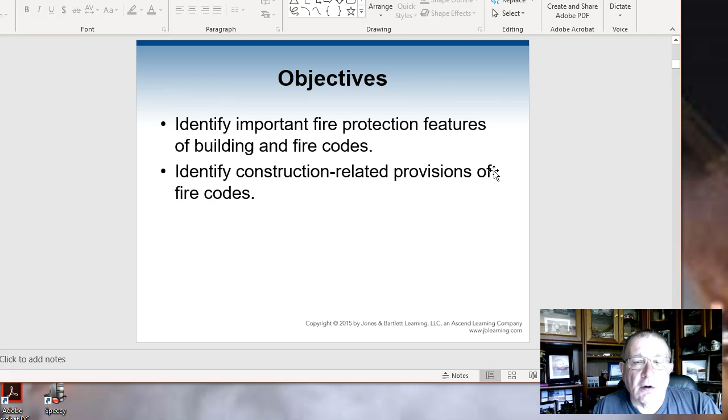The objectives are pretty much the same. The fire protection systems and building and fire codes are all about basically saving lives and living in a safe environment.

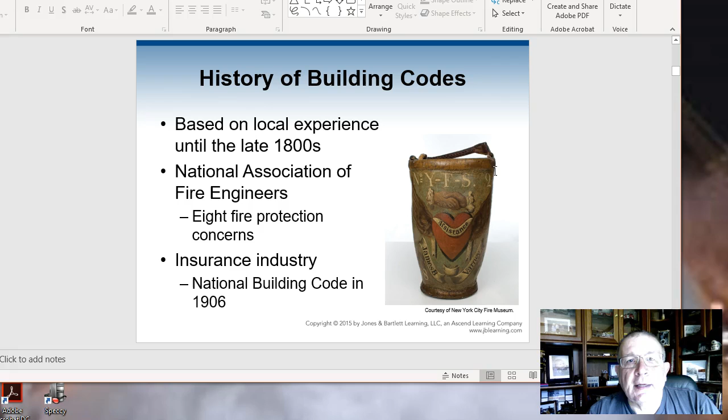The building codes history goes back to the late 1800s. The National Association of Fire Engineers and eight fire protection concerns all came about. But the biggest thing was the insurance industry realized one thing, that they needed to have a code that makes sense. So the model codes were developed, and so came about the National Building Code, the Uniform Building Code, the Standard Building Code, and of course out of all that came the International Code Council, which exists today.

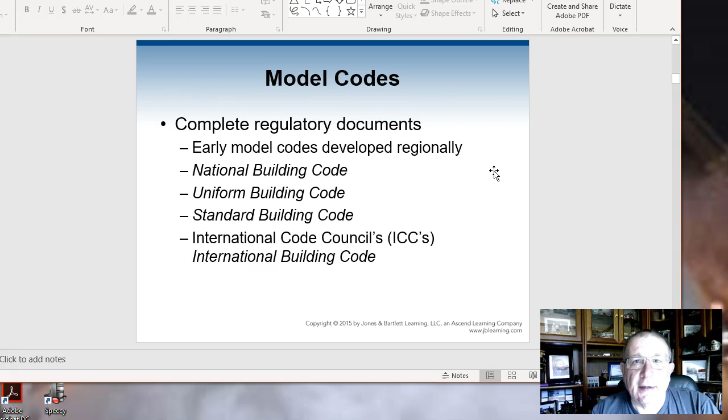Older codes were regionally adopted, but are no longer produced. Fire codes today generally have an update every 3 years, and they're all based on the standards. And if you know about the standards, they come out of NFPA and the various testing agencies that support those standards.

Fire code regulations are to be employed on the fire service after the building is built. Basically, I tell everybody, we never get a divorce from a building. We inherit it till the day it goes on the ground. And I think the biggest thing I can tell everybody is that if a building is built bad from the beginning, the fire department always has to deal with the inspection headaches that go with that building. And again, the fire codes and standards are updated every 3 years.

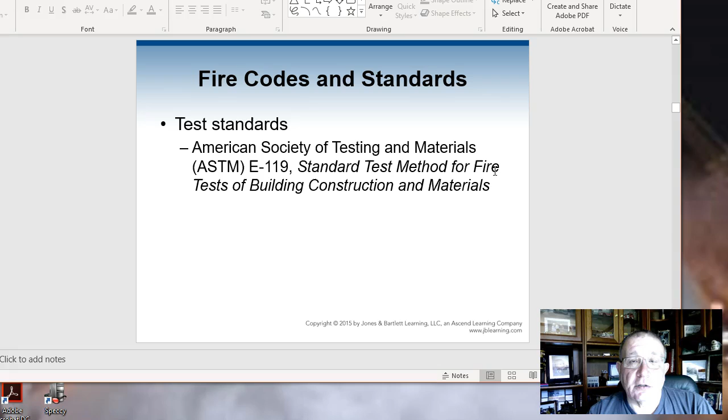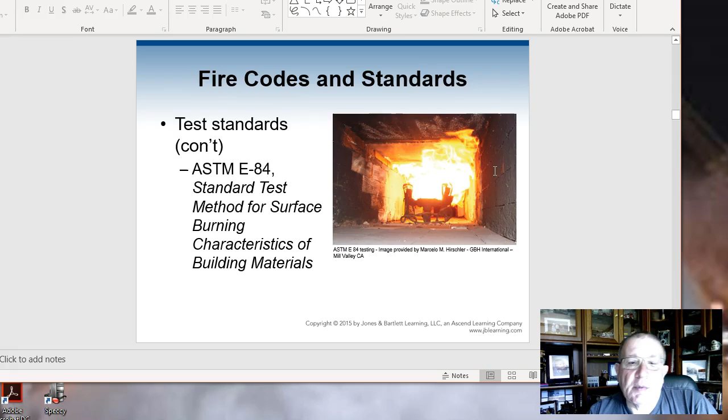Testing standards come from the American Society of Testing and Materials. ASTM E119 is the testing method for all construction materials, but it does change by standard of testing. ASTM E84 is the fire surface or surface burning characteristic test, and that's also used to determine what type of building materials are out there.

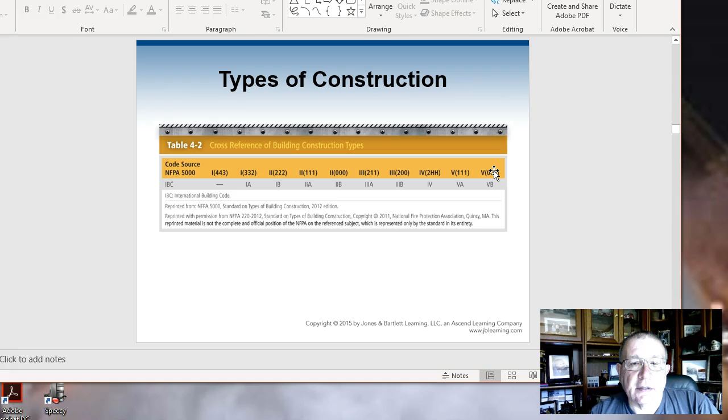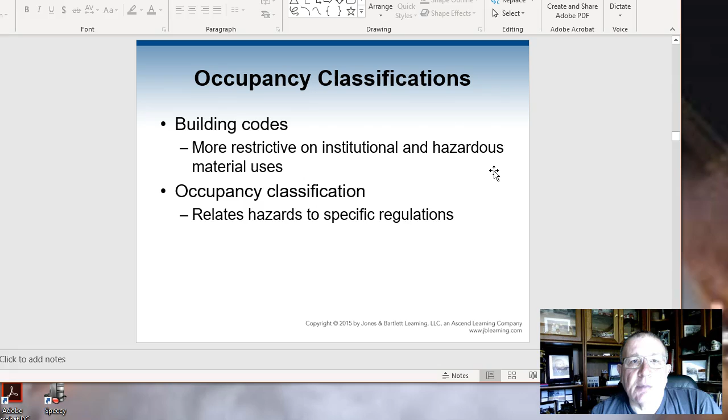Construction codes have come into the International Building Code, NFPA 5000, and of course the hybrid buildings that are out there. This kind of gives you an example of the codes and the references, and I direct you to the text on that. Occupancy and classifications of building codes, and how are they employed by the occupancy and the type of building that's being built.

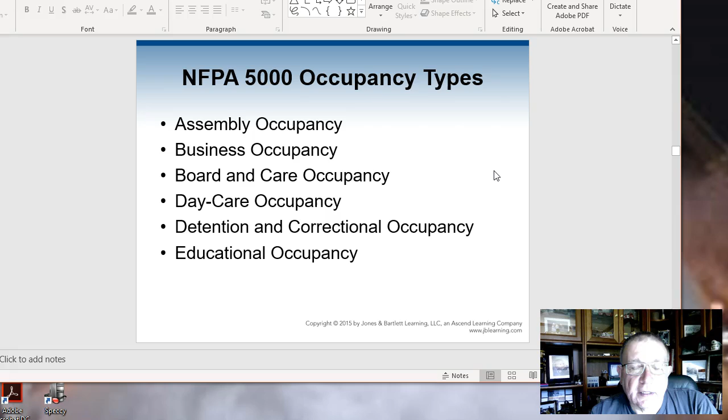You've got to remember A1 through A4, B and E, B being business, E being educational, F1 and F2, and then H1 through H5 being high hazards. But the biggest thing is A is for assembly, B is for business, D is for daycares or detention and correctional occupancy, and E is for education.

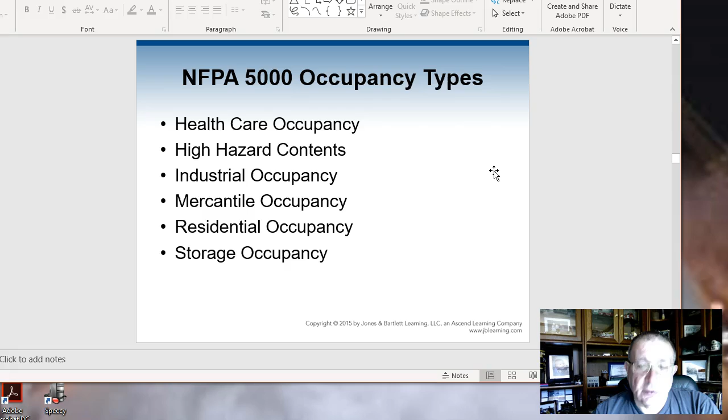The 5,000 types are healthcare occupancies, high hazard contents, industrial occupancy, mercantile, residential, and storage. Building height and size are required under various codes, and also local zoning controls the height of the building. So don't forget that.

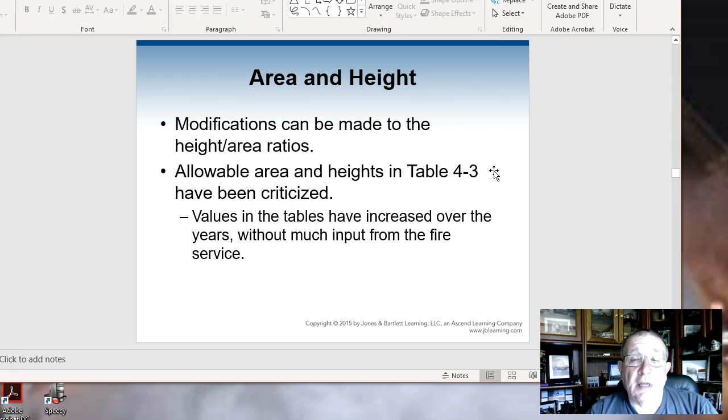Modifications in the tables that are there - one of the things that's changed in the building code that I can tell you right now is we're now building high-rise buildings again, more than 4 stories. Most you'll start seeing 6 and 8 story buildings being built out of wood construction. Table 4.3 kind of lends you to how the construction type is - 1, 2, 3, 4, and 5 - and the hour rating as needed.

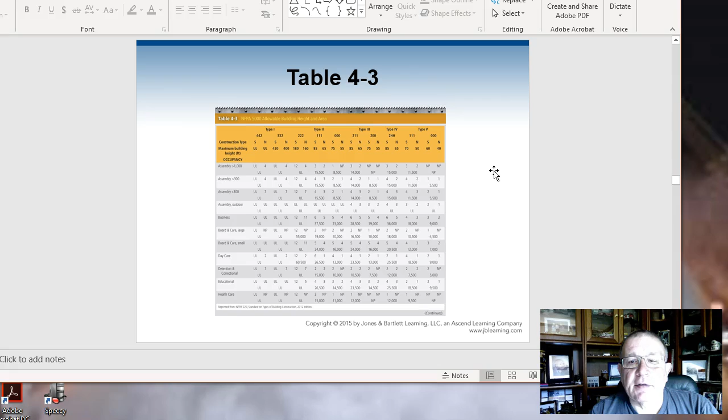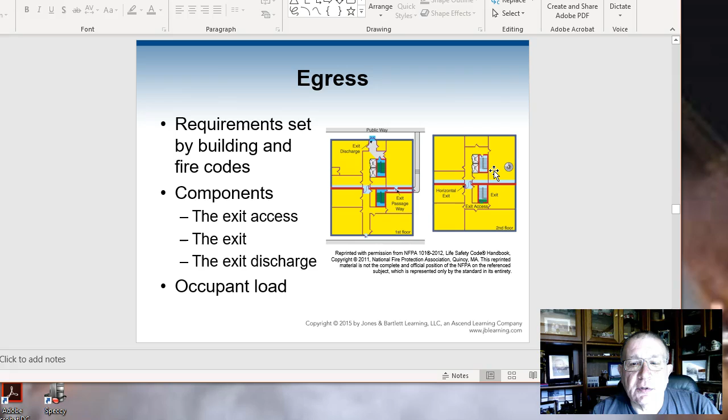One of the biggest things is special hazards. You have special structures such as atriums. You've got your high-rise structures. You've got your open mall spaces. You've got egress issues with all these buildings - what's a good way for the flow pattern out of the building? But more than anything else, you have to look at the occupancies, how they're rated in the building, and the type of load that occupancy can handle.

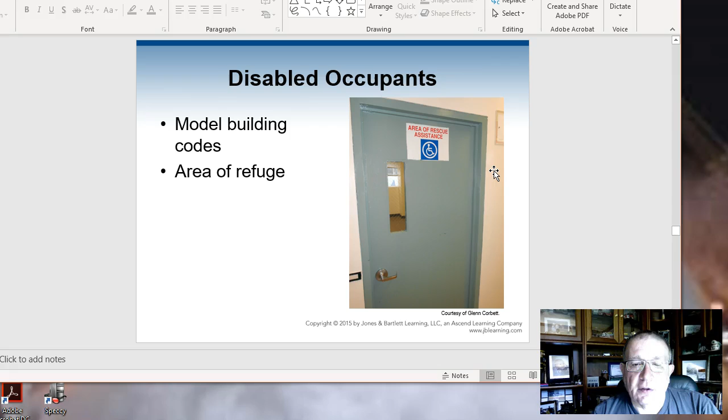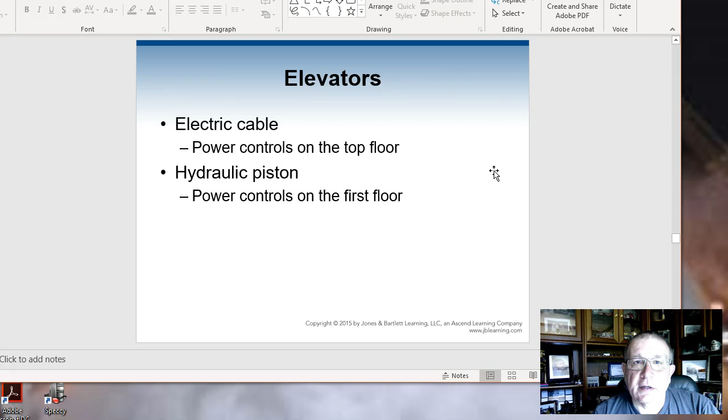Areas of rescue and assistance are there, but the biggest thing you've got to look at is the purpose of the building and how people are going to get out. Fire protection systems matter too. Elevators are key — is it a hydraulic elevator or electric cable? It all depends on the height of the building and the purpose of that elevator. You're not going to use a cable elevator on a 4-story building; you'll use a piston type. But you'll use a cable elevator on a 6, 7, 8, or 10-story building.

Phase 1 operations are for recall. Phase 2 is for the fire department, giving them access to the upper floors.

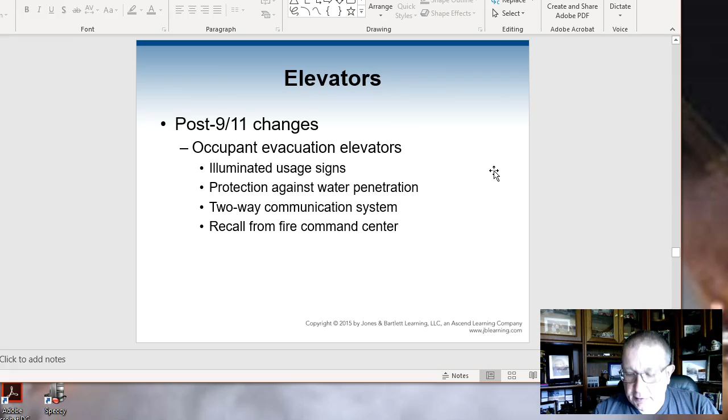Elevators, post-9/11 changes: occupant elevators, evacuation elevators, illuminated usage signs, protection against water penetration, two-way communications, and recall from a fire command center were all changes that happened after 9/11. It also brought elimination of hoseways, a minimum 150 square foot lobby, and class 1 hose outlets in the stairwells.

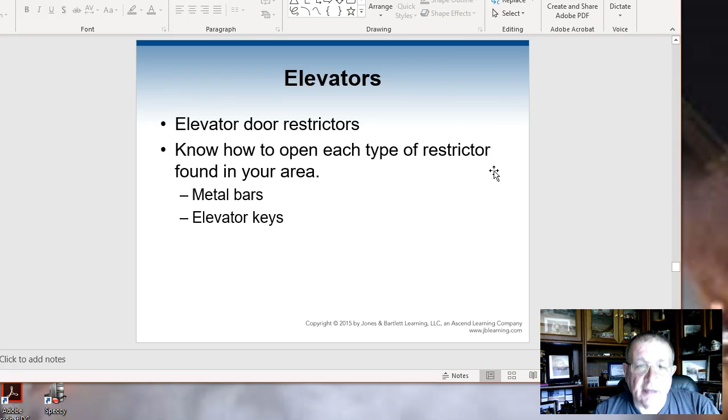Elevator door restrictors — you need to know how to open each type of restrictor found in your area, metal bars, and elevator keys. The building code itself provides a lot of good information; I direct you to read that.

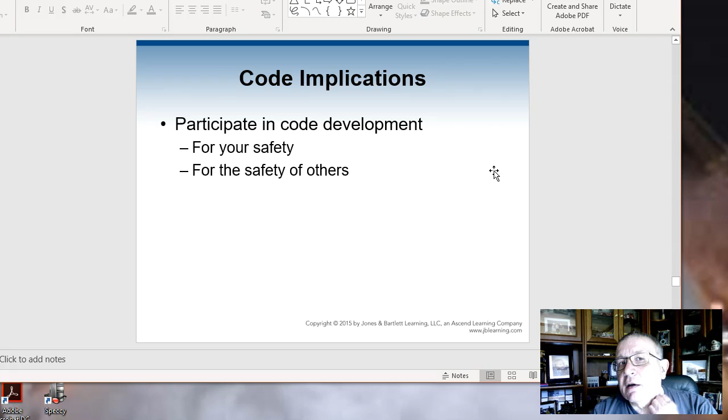Code implications: what happens when the code doesn't address your concerns? You have to go through research and assess the proper code against NFPA findings and how that comes out through code, fire code regulations, and also through the standards. The standards sometimes dictate how the code has to be applied.

So in chapter 4, you're looking at what the subsequent regulations are and what's going on, and how they've been applied in towns and cities.

This is a good example, quite frankly, of a quick summary of what you're going to see in this chapter. You need to read the chapter and understand what you're doing here. Thank you.

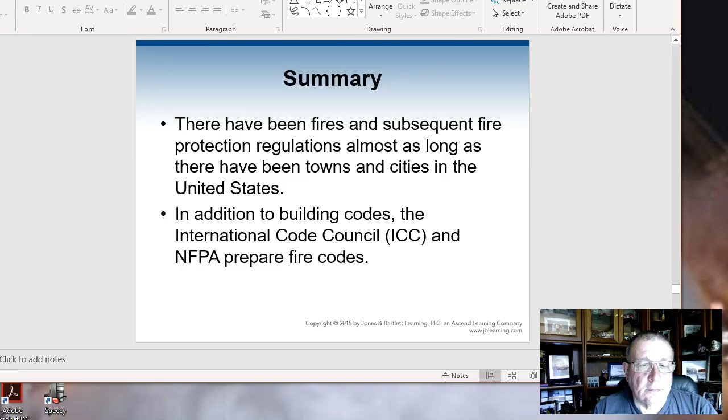Okay, we're going to start out with chapter 5 here, fire behavior and building construction. It's pretty much an add-on to what we dealt with in chapter 4, but you're going to start looking at some things a little different. The objectives here are the fundamental behavior and the key to fire phenomenon.

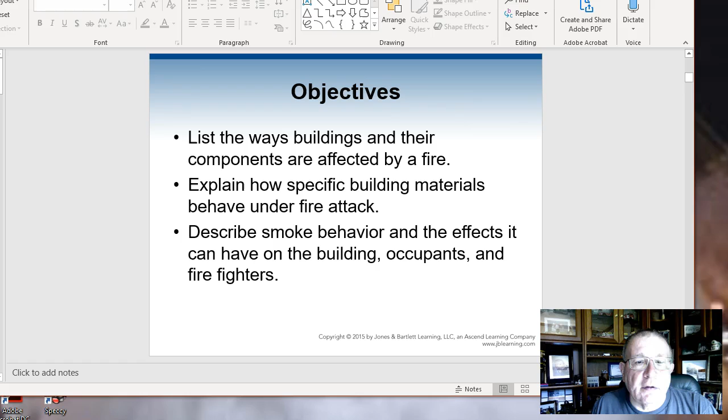The big thing is to list the ways buildings are affected by fires and the specific materials that behave under attack of fires. So we go into basically the fire behavior elements here. I'm not going to get into a long lecture on this — this is in your book. But heat transfer is really important. This is a good example of conduction, convection, and radiation.

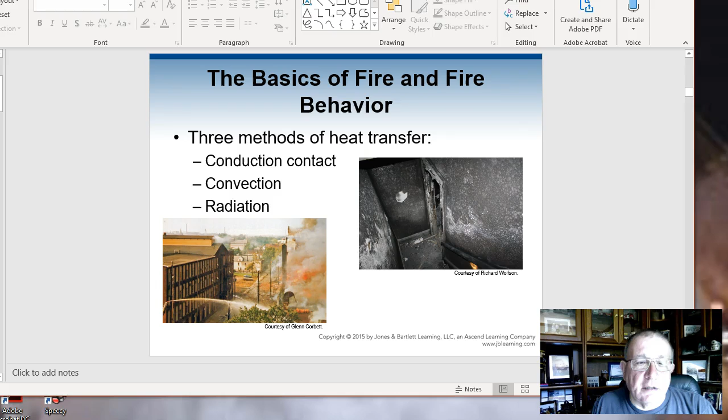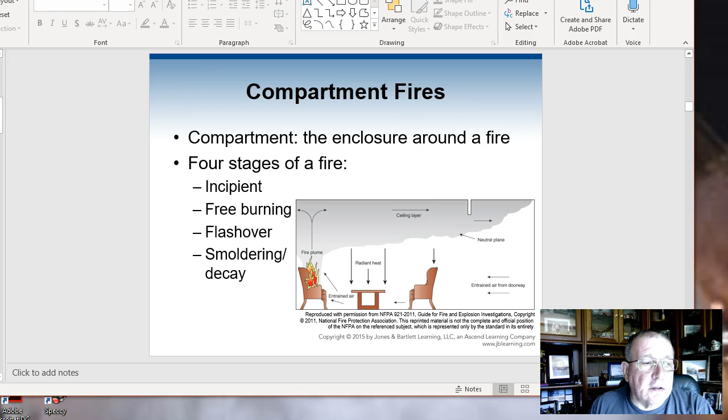Compartment fires basically go through the incipient, free burning phase, flashover, and smoldering decay. Those are key elements you're going to see in the basic concepts of fire behavior. One of the big things you've got to look at is a fire plume, smoke, heat, gases, ceiling layer, and the neutral plane.

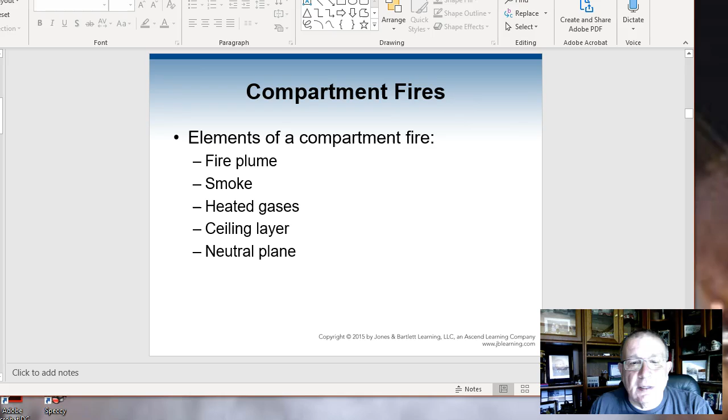But the big thing is, more than anything else, you must consider all the tactics that go along with fighting compartment-type fires. You've got to look at the interior combustibles, the vertical openings, the height of the room, proximity of walls with each other, and HVAC systems.

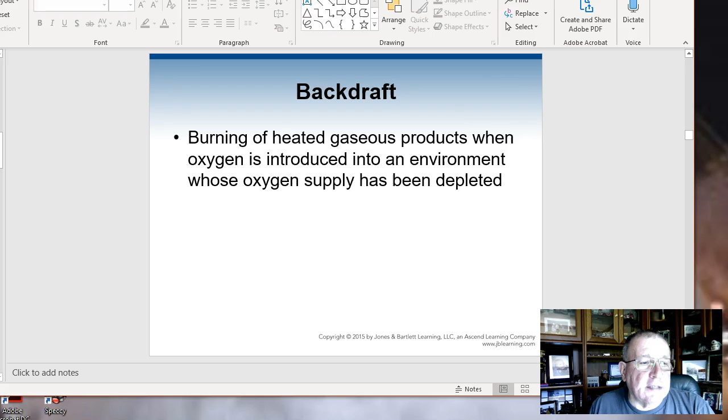Today's fire service, I'll tell you this right now: in lightweight construction, it doesn't matter if it's steel or wood — any lightweight construction — the rapid spread of fire in a building like that leads to one thing, a rapid collapse. You've got to be very careful. You have to understand that those components are combustible enough that they can deteriorate right in front of you, and as an entry crew and a firefighter, you could have a very dangerous situation.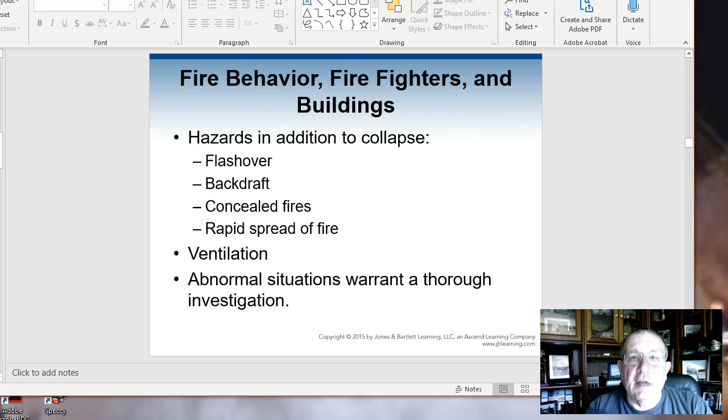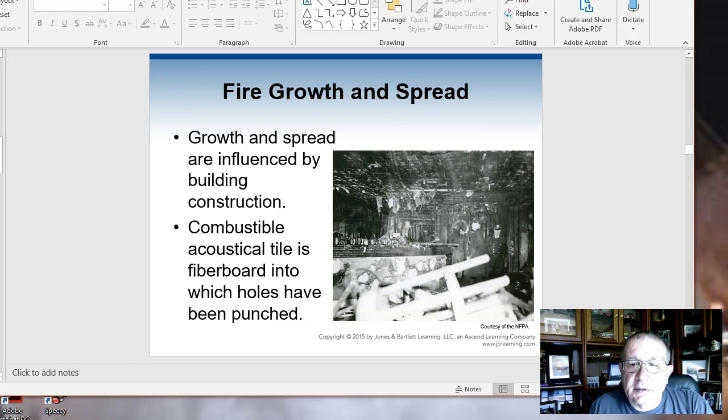This kind of gives you an idea of what happens with fire growth and spread. This is the aftermath that you'll see — a picture of basically what happened after a fire there. In your book, you'll have the MGM fire, the famous Coconut Grove fire, how fast that fire grew and the loss of life that went along with it, along with Beverly Hills in 1977.

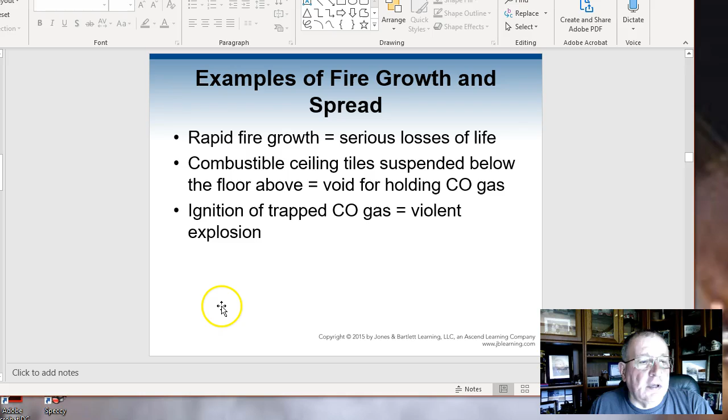You got fire hazards, and the list goes on. As you go through this, you look at your finishes, and you're looking at more than anything else why some of this comes back. Years ago, the big tents were put up with fabric, cork, rattan, and wood, and then they have a fire breakout, and people are dying because it collapses very quickly.

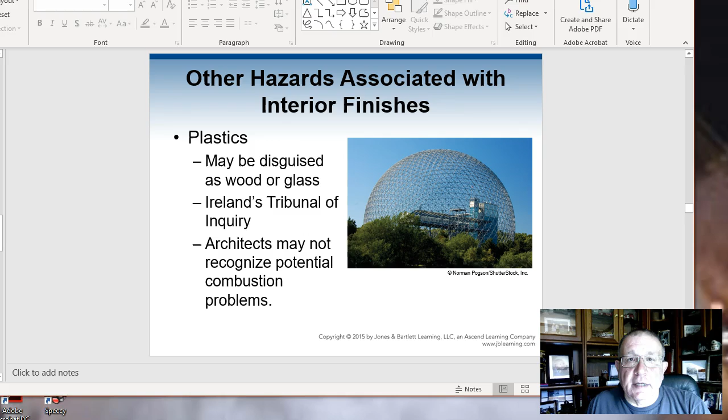Plastic is now one of our biggest problems. If you're looking at hydrogen cyanide, it's just generated from plastics. It's thick, it lays in the air, but you also have SO2 and other sulfides that come about from incomplete combustion. Look at the woods you see today or the cosmetic furniture you can buy. I hate to say it, at places like IKEA or any furniture store, there's a lot of plastic and polycarbonates involved.

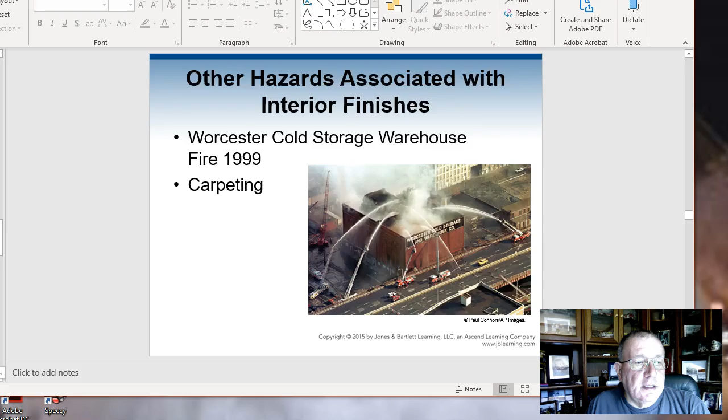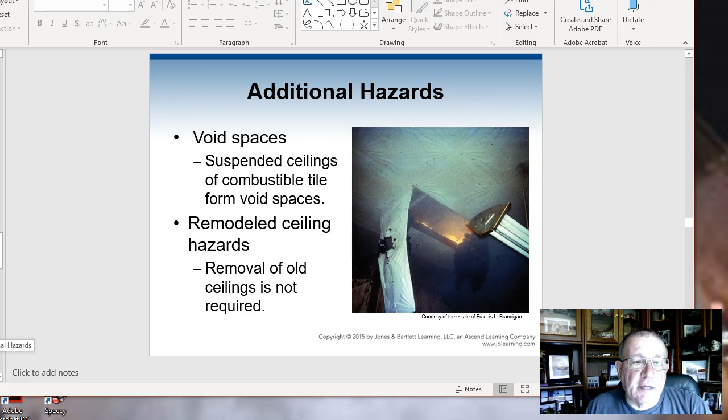In the case studies that I present to you in this whole array of building construction, it's always centered around a line of duty death. And the reason why is because mistakes are made. I'm not here to point the finger. I'm not here to say this was right or wrong, but I'm pointing the finger at the building. So when you start reporting on this, start thinking about the building and what happened with the materials. And you'll be surprised how sometimes we just walk away and don't even look at what we just walked into or walked out of. And we get blinders on.

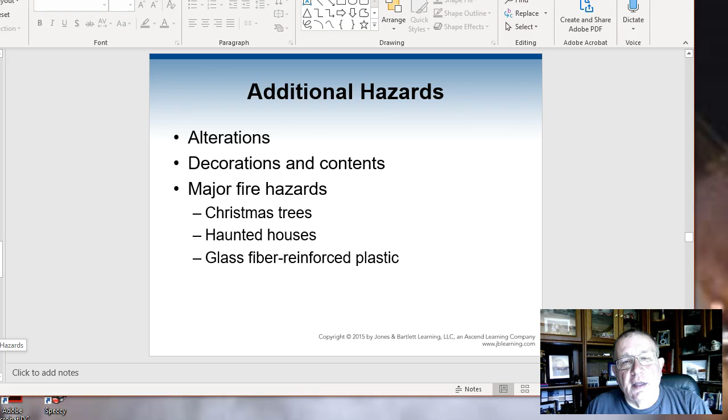Today's office buildings, you got a lot of cubicles going on. So the big thing is now you've got additional hazards with decorations, Christmas trees, people making haunted houses, glass reinforced plastic in the houses and that. But today's fire load and the heat of release is greater today than when the fire codes were basically put into written form. First Interstate Bank fire, hotel remodeling, regulations in California, Boston, and the Port Authority of New York and New Jersey all have different takes on what they want to see in their fire protection.

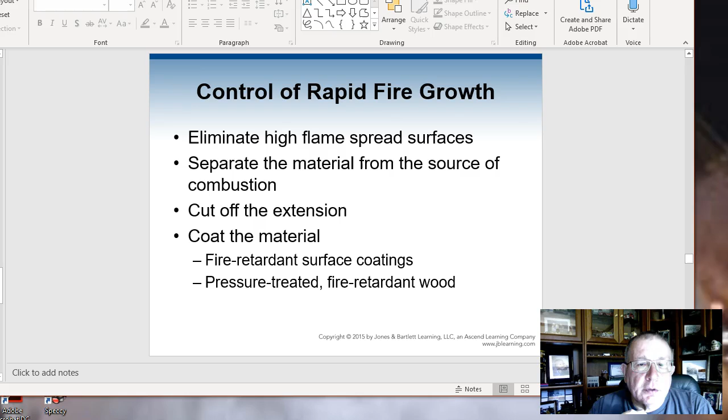Control of rapid growth is important, but the biggest thing, more than anything, is to know your products of combustion. Smoke tells you a lot. Airborne and liquid particulates produced by fire, hydrogen cyanide, carbon dioxide, CO poisoning.

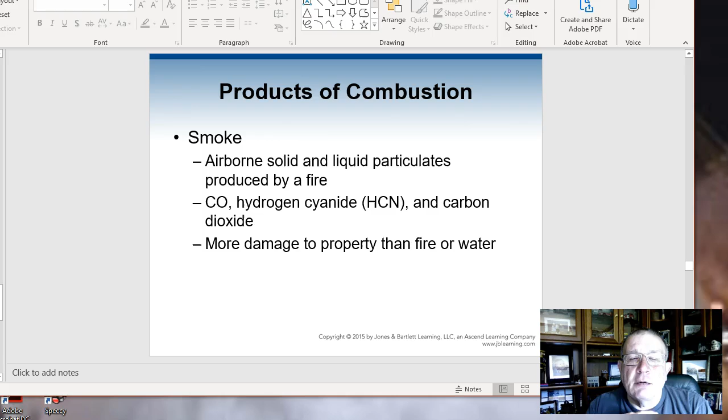More damage is done with property. It can be done with... excuse me, more property damage can be done with water than with fire.

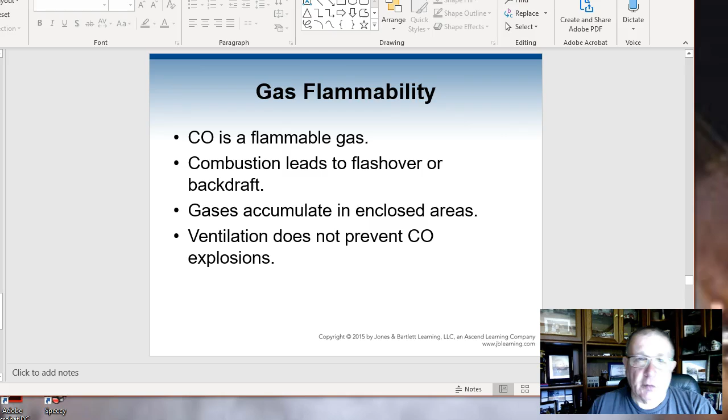CO is a flammable gas taken to the right ignition temperature. Combustion leads to flashover and backdraft. Accumulated gases in the closed area of ventilation do not prevent CO explosions. You got to look at this. You got to ventilate a structure the proper way. You also got to look at what's burning, and you also look at how these gases are going to build up on you and how quick they can turn the tide in a structural fire.

You got to look at the physical effects on people. CO is odorless and tasteless, and smoke particles can prevent air from filtering through properly, causing people to lose their sense of direction, and so on and so forth. Smoke damage may be the most expensive byproduct of fire. It's everything. If you have a smoky fire, everything's basically destroyed.

Contamination by radioactive material, polychlorinated biphenyl, PCBs are very dangerous and very costly to clean up. A nuclear plant in Hanford, Washington - the cleanup probably cost more than the plant itself, all because of the toxic effects of PCBs.

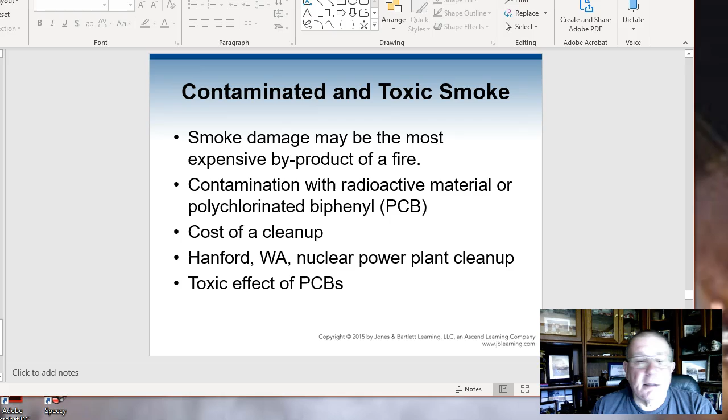Summary: fire behavior is critical for all firefighters. And the biggest thing is that you have to look at the associated risk with fire growth, how high flames spread in materials. Biggest thing is, more than anything else, look at the strategic events of a fire, how the fire has grown and where it's going and what's going to happen.

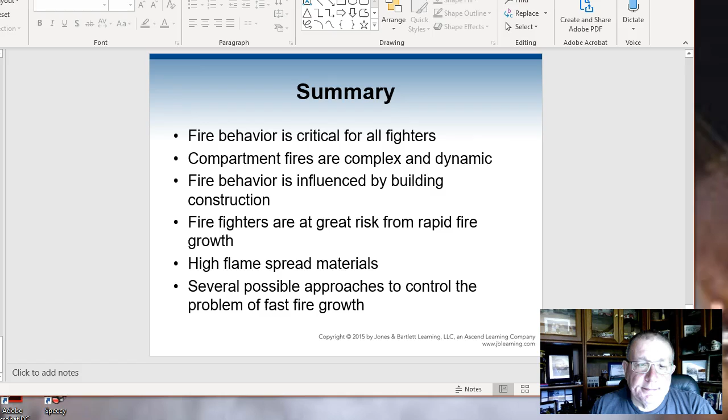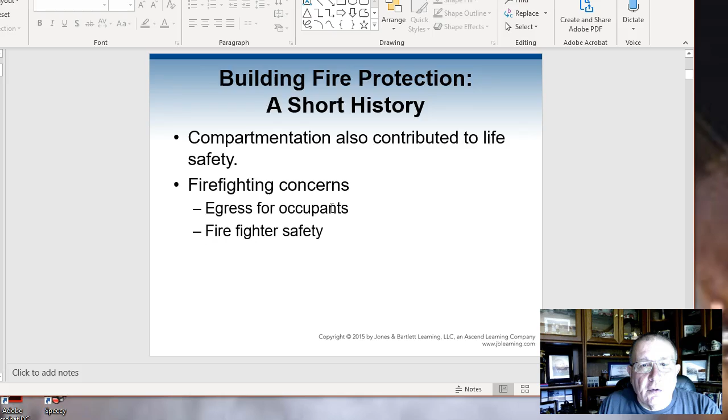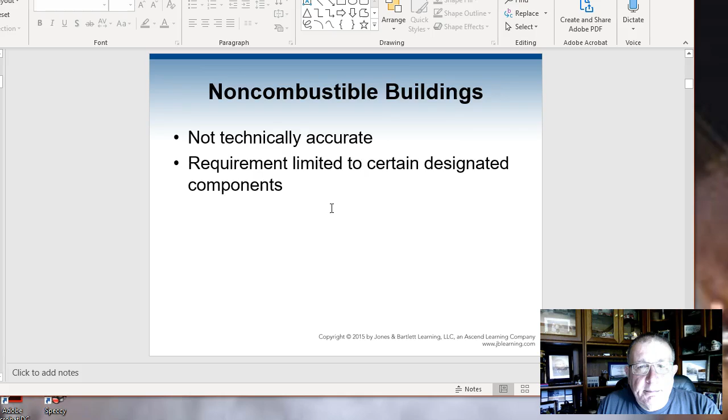This is chapter 5. Chapter 6 is a very long PowerPoint slide presentation, and I'm not going to go through the whole thing. Non-combustible buildings is part of it. Fire terminology is part of this. Non-combustible buildings, again, fire resistant designation, early fire test.

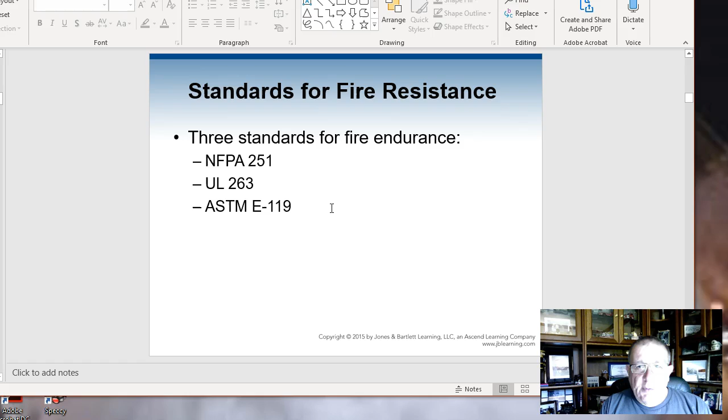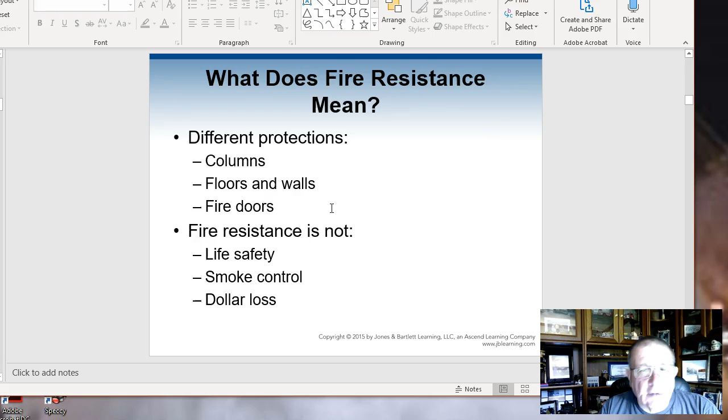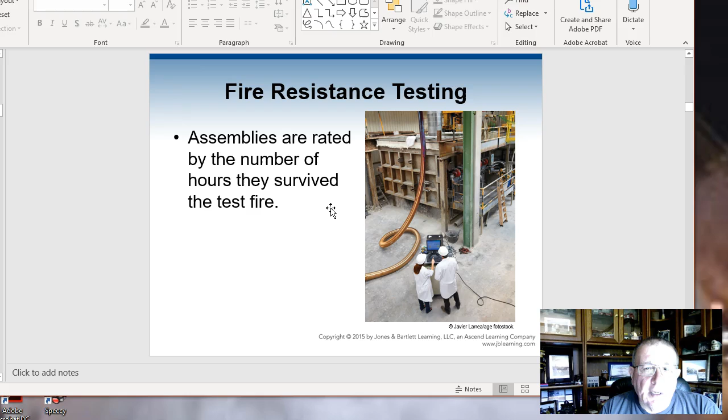Columns, floors, walls, beams - fire resistance is not just about life safety, smoke control, or dollar loss - everything is important. There's a good slide in the book, slide 18, in regards to fire resistant testing and how things are done, and it gives you a good example of how that goes through.

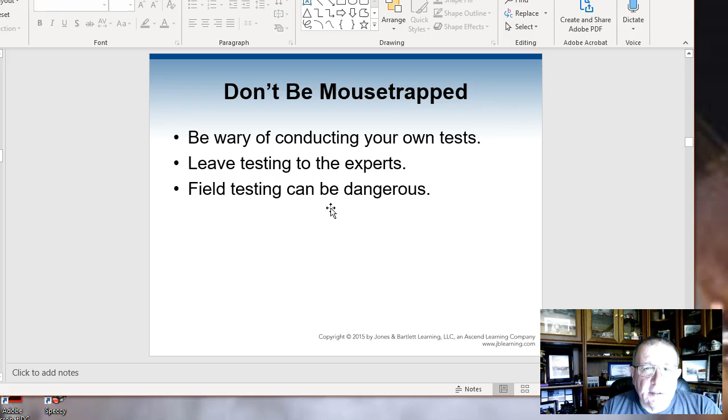The big thing is, as I go through this chapter very quickly with you all, this is just a snippet of what you have in this chapter. You have to look at fire containment systems that are being installed, fire dampers. Buildings have fire dampers in them. There's a massive amount that goes into the ductwork in regards to HVAC, so it can stop the flame spread of fire through a duct system.

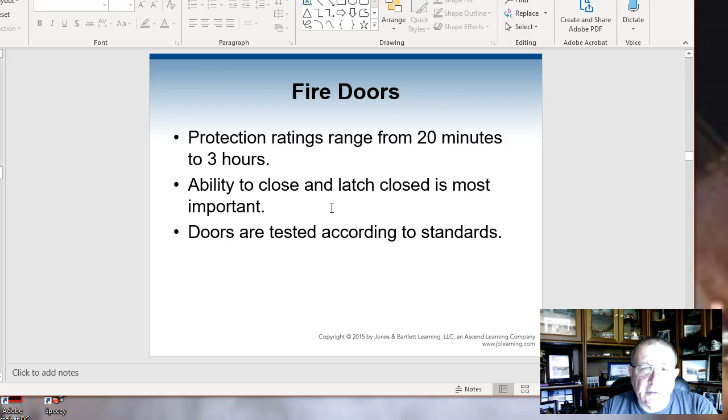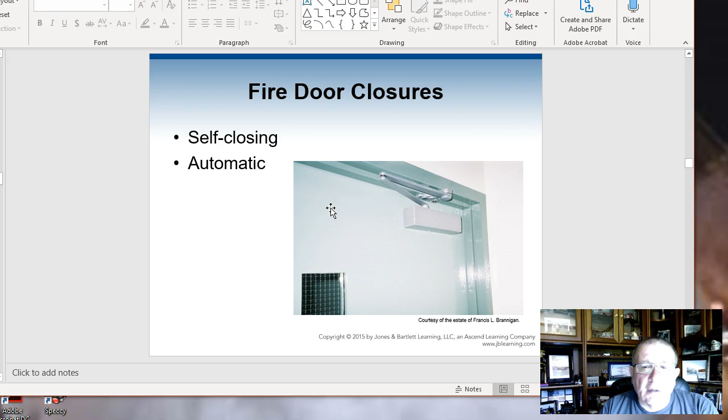Fire doors have to be rated, and they need to be in any commercial structure. Generally you'll see fire rating doors at 2 to 3 hours. A good example of that is a swing door like this with panic hardware on it. Big thing is overhead doors and rolling doors - these are all part of this, and so is the closure on the building. So you've got all these to deal with.

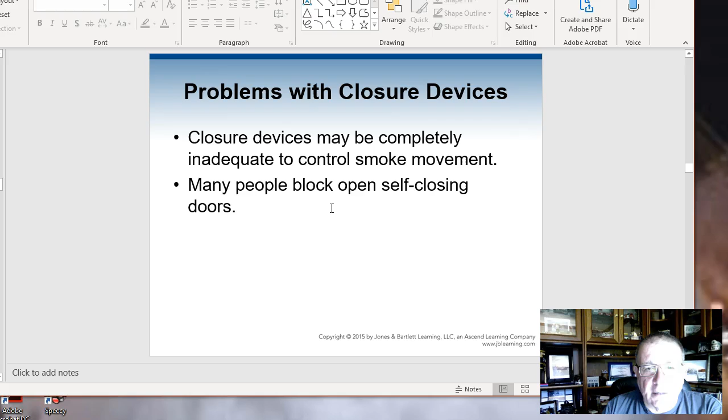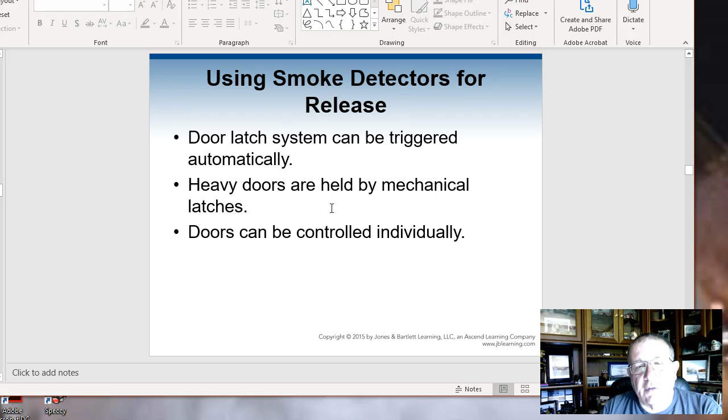Problems with closures - what happens is generally in a real smoky environment, they become stuck, hard to open up. And sometimes people block open self-closing doors. The problem with that is when they block it, it makes it very difficult for the door to react the right way, what it's designed to do.

The other thing is stairwells. People like to wedge things in stairwells and put stuff underneath the steps. Case in point, it's all part of a system that can't endure storage underneath of it. It's designed to stay open so that it's free of any type of fire threat.

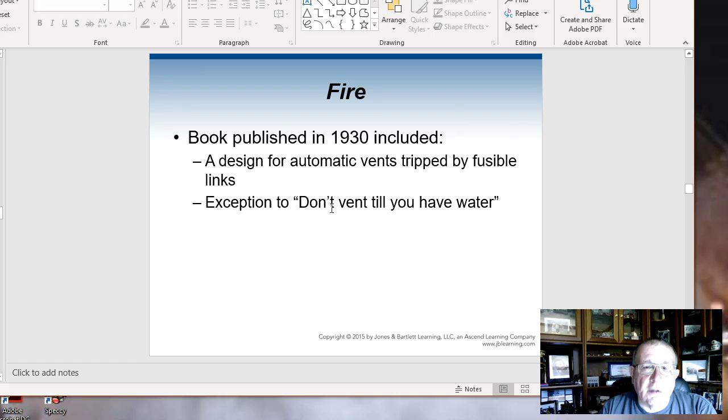You have smoke barriers in buildings, and most buildings today are now smoke-free under the laws. So we have all that. Escalators are important - you've got to understand what they do, and you do the compartmentalization. The book published in 1930 was called Fire: The Design for Automatic Vents Tripped by Fusible Links.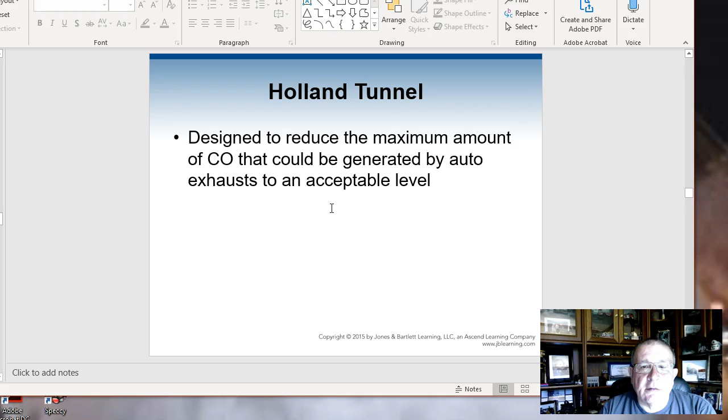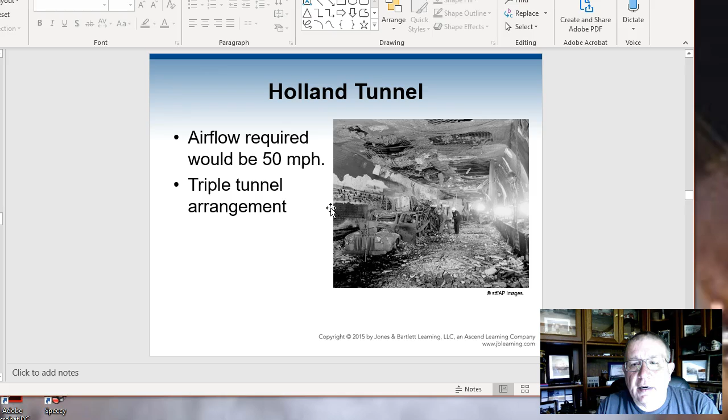Big thing is the Holland Tunnel. There's some interesting comments about the maximum amount of CO to be generated by an automobile and what was the acceptable level because of pressurization. Here's a good example of what happened in the Holland Tunnel - it required an airflow of 50 miles an hour, a triple tunnel arrangement, and they had a fire and basically closed the tunnel, and it had to be redesigned.

The Eurotunnel is an extensive design - you have to look that up. Automatic sprinkler systems and the type of sprinkler systems that are out there, and the pros and cons.

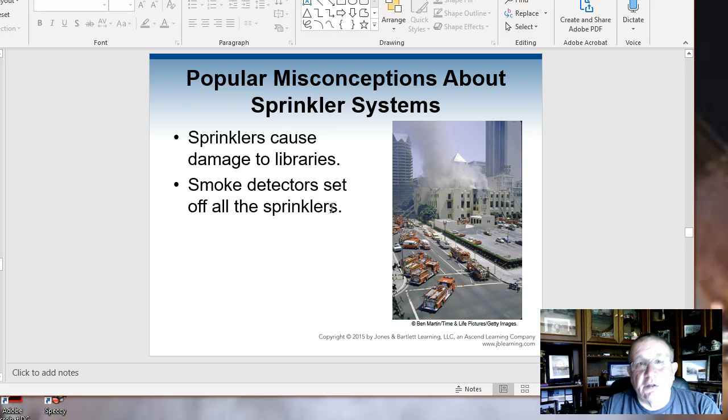Misconceptions about sprinkler systems: they cause damage to libraries. Smoke detectors set off the sprinkler system - no, smoke detectors do not set off the sprinkler system. Fire sets off the sprinkler systems.

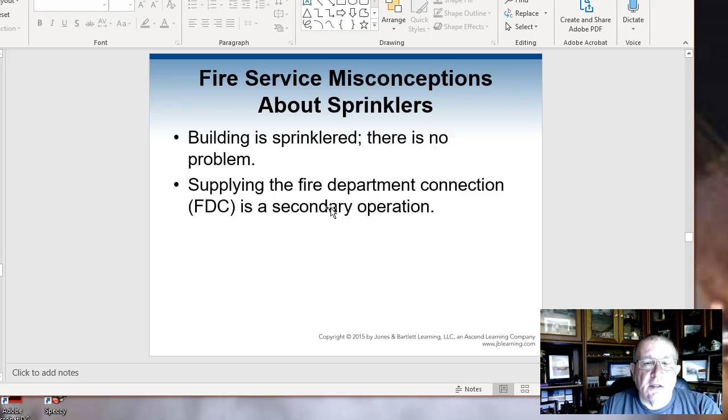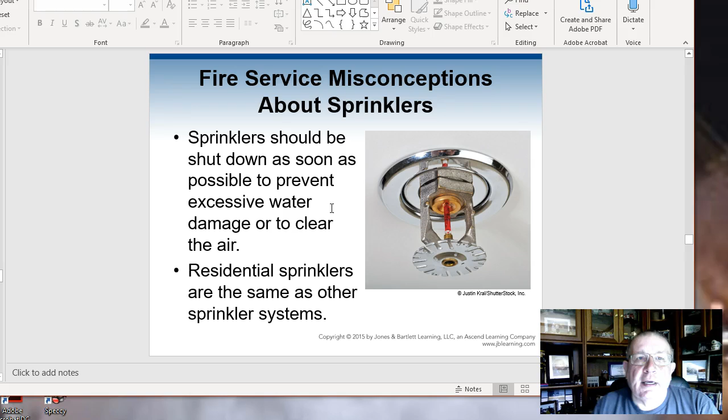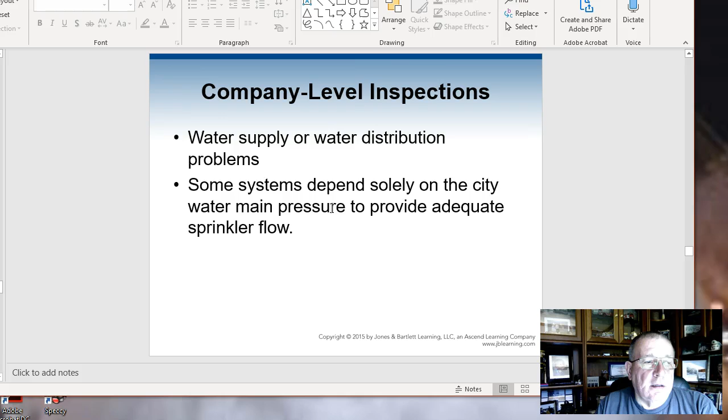Keep this in the back of your mind. Department policies are important, company levels of inspections are important - how people have got to look at construction of high-rise buildings, preservation of historic buildings, and unsprinklered voids. Sprinkler fraud - there are a lot of people in today's world that want to think they're a sprinkler contractor, and they shouldn't even touch a sprinkler pipe or a sprinkler head.

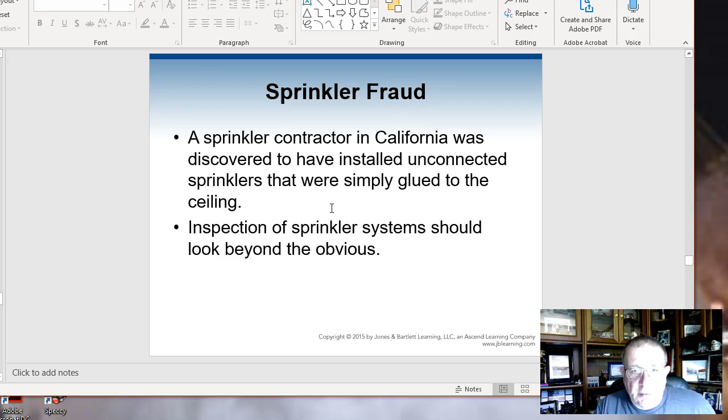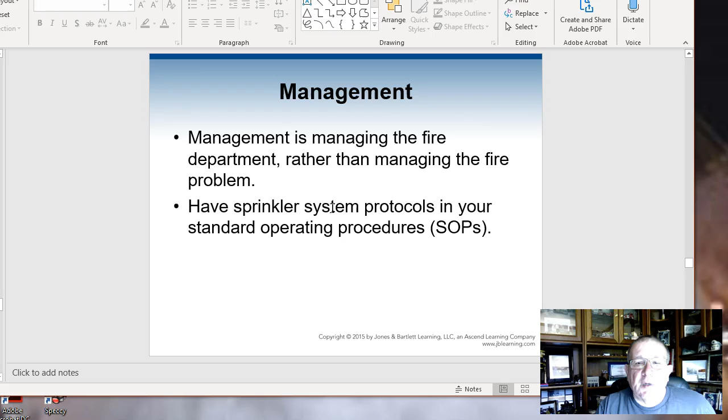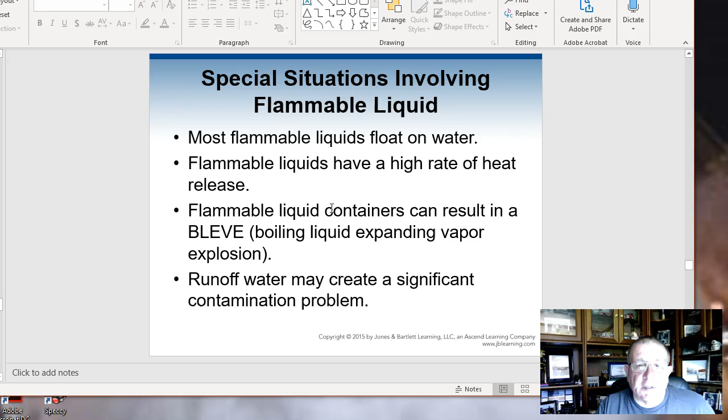Management is managing the fire department rather than managing the fire problem. Have sprinkler protocols in your SOPs - in other words, go look and see what the fire department has developed or needs to develop as far as sprinkler management systems on high-rise buildings and so on and so forth.

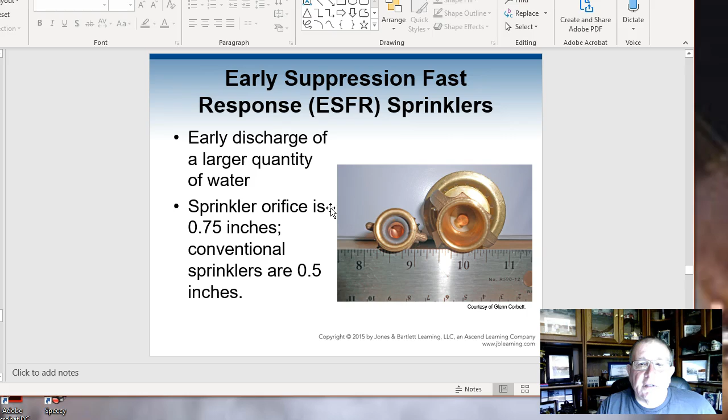A lot to go through here in regards to what they call ESFR systems - that's Early Suppression Fast Response systems. You also have standpipe systems, standpipe water, NFPA 72.

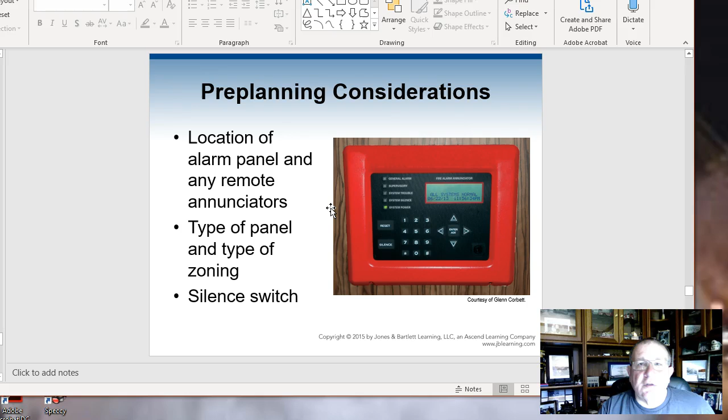You also have the codes from NFPA 72, initiating devices, panels, pre-plans, the type of communications device you're going to see. Most of what we have now is an addressable system that tells you where the smoke head number is, say 202, and you should have a chart right there that tells you where 202 is to go find it.

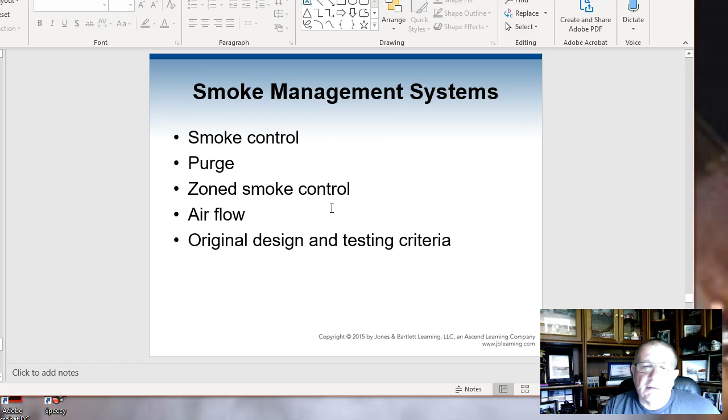Public address systems in that, smoke management systems - they're very important today where you have smoke management systems that have not only smoke control to purge the area, but it has zone smoke control, designated airflow design with it, and it also gives testing criteria, how you do it. Control panels, pre-planning fire considerations, all these are important to you.

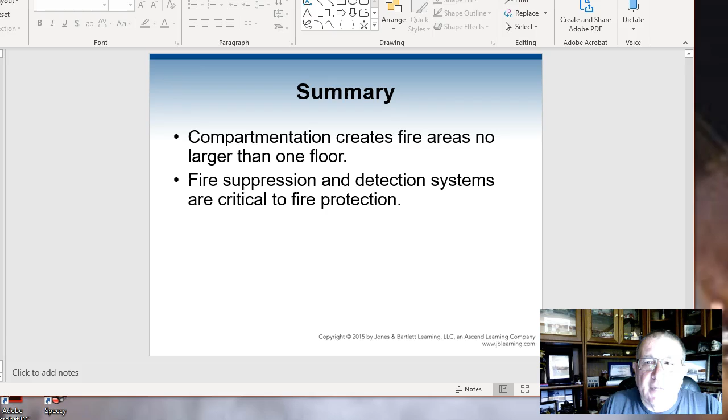And this is a very brief overview of this chapter that you have. I hope you enjoyed it, and if you have any questions, by all means, call me.